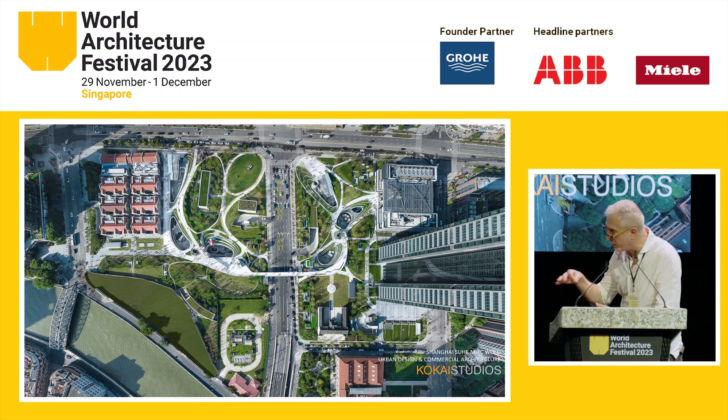The project is located in Shanghai, in probably the most valuable area of the city. The challenge of this project was to try to challenge a system of development in the city, as well as to resew the wounds that the city had been going through in the past decades.

Shanghai is a city that has seen a lot of very fast transformations, sometimes extremely cruel and serious, in a way that the history has been wiped out, and the blocks of the city and the communities have been taken away from their roots. The city went through an incredible system of tragic transformations, leaving a lot of deep wounds in the city. So what we tried to do here was to resume the community to the city itself.

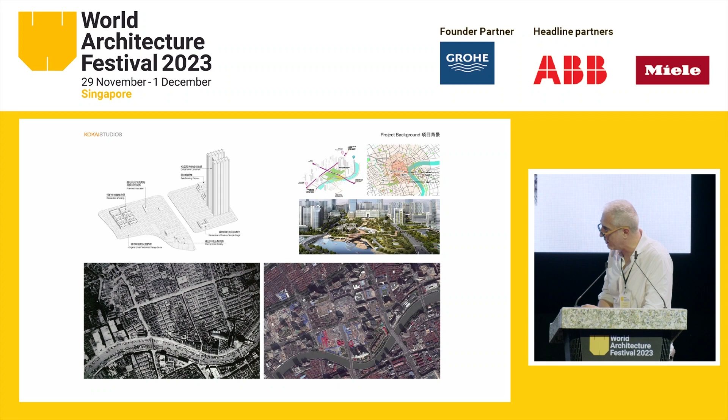We challenged a system in which a plot of land like this has an incredible value for speculation of development from both, unfortunately, the government and the developers. China is a system that's extremely speculative. We tried to convince them instead to have a completely different strategy of development. During the competition for this project, we were able to convince the government and the client to consider a completely different approach to the city.

It is to create a system of layers that reconnect the city to the land and to the waterfront of the Suzhou Creek. So instead of developing a typical shopping mall, as the client used to do, we transformed the system of retail underground, creating an urban valley.

The reason we want to create an urban valley is because we want a sustainable system in terms of carbon-free development strategy, and also to create an efficiency in the commercial space completely different from the traditional one.

Usually, a shopping mall is one of the most inefficient thermal machines in the world. You barely reach an efficiency of 65%, where 35 to 40% of the spaces are heated up or cooled down in a very inefficient way.

We transform this site instead into an open city, completely permeable to the city, with a valley where we can control the temperature—a drop of 5 degrees or an increase of 5 degrees according to the seasons—using the trees and nature that we plant above. At the same time, all the public spaces are open and not conditioned. So in terms of thermal efficiency and sustainability, we reach an incredible level. For us, it was very, very important.

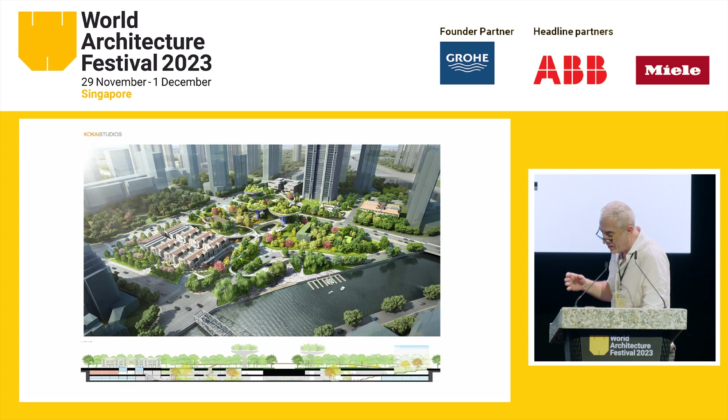We've been working in the Shanghai environment on the city texture for 20 years, trying to preserve the historical heritage of the city. You see the location—it's the last open space left in the very strong CBD of the center of Shanghai. The value of this land is unbelievable.

So to convince the client and the city itself—because the government makes a lot of money on taxes from the retail and tenant point of view—we worked to reduce their targets in order to give a benefit to society, to give a place where people can recognize themselves, can meet, and can enjoy a green park.

That is a very simple thing for us. I come from Italy, from Venice, so for us, nature and parks in cities are normal practice. In Shanghai, it's absolutely not—there are no parks, no green areas in the center of the city.

And as well, you see how this new road that goes from north to south cuts in a very strong way the west and east side of the park. And as well, the very strong development of high-rise buildings around creates constraints to the community around.

So how did we do this? As I said, we create a valley within 3 different mainstream points of attraction on the site. On the left side, we have a system of traditional Lilong, Shanghainese Lilong houses that are being preserved on site. We have an old temple, which is a typical practice of Shanghai of how to deal with their history.

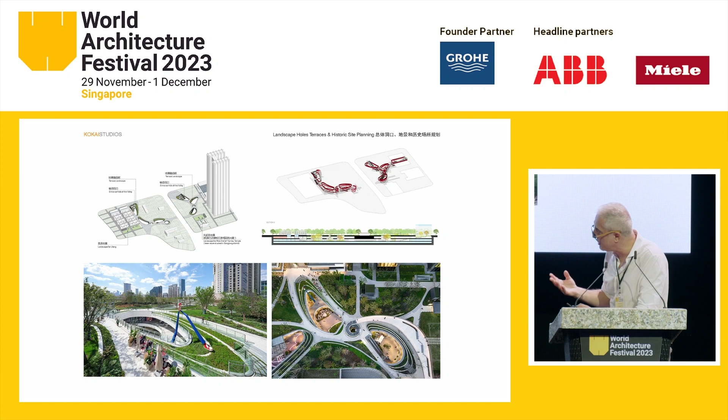So we create this valley, as you see, between the 2 blocks, creating this system of holes. We create a system of gates to go to the different layers, because the site is completely permeable on the ground floor. There is a system of entrances related to the different points of attraction: one in a new building next to the high-rise tower that Norman Foster designed, one next to the Lilongs, and one next to the temple.

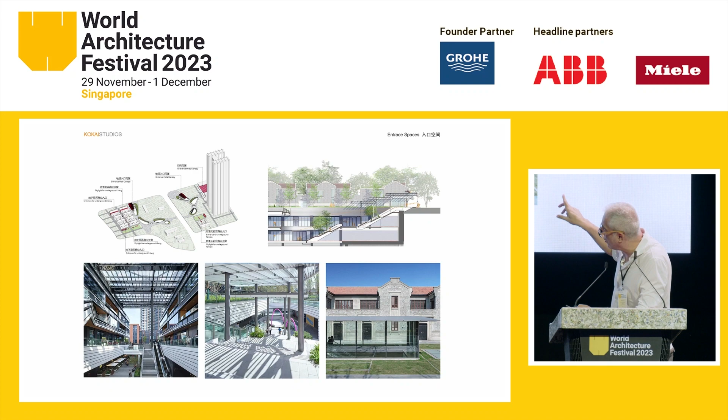In a way, another layer of connection has been created. As with all architecture projects, especially when you work at a city level, the projects are never perfect. Originally, we were thinking to connect even more, east and west. It was a very strong challenge to convince the government and the Traffic Bureau of Shanghai to let us build a bridge on top of a public road.

But at least we were able to connect and give a different opportunity for the two sites to connect to the people. And the system in which these holes and paths are designed in an organic way gives freedom to the people to walk through this space in a very spontaneous way. It's incredible, because for us, after finishing a project, we hide and observe how people use it, because it's impossible for an architect to control a project completely.

You need to have a very strong modesty, because the systems are very complex, even more so when you work at a city level, on a social point of view like this. And it's incredible to discover how people keep going around the loops, always choosing a different path, and never get tired of going around.

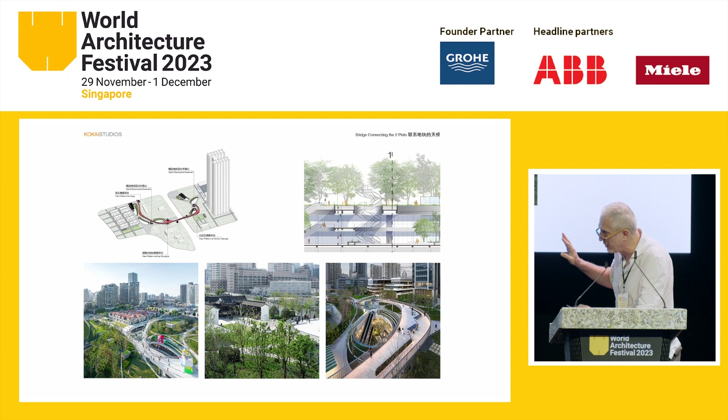And it's incredible. The success of this place is also focused on the usage and on the retail point of view. Let's not forget it's a commercial project. We were very proud about the fact that this project did not attract any of those top luxury brands in the world, the copy-and-pasted projects that seem to be everywhere. It's not a billboard building, as we call the shopping malls, but instead a completely permeable system of functions that are used by the neighbors.

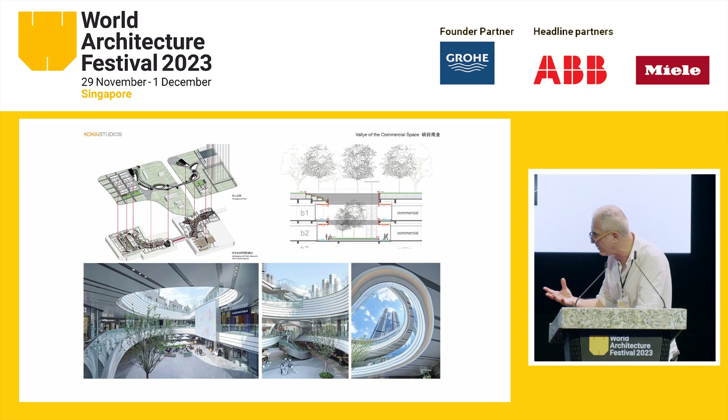So this place became a system of F&B, entertainment and services for the neighborhood. It really achieved the target of becoming a part of the city, integrated and free flow. This was important for us.

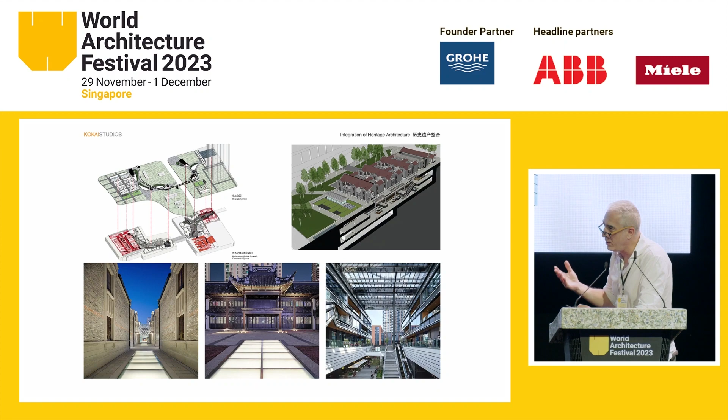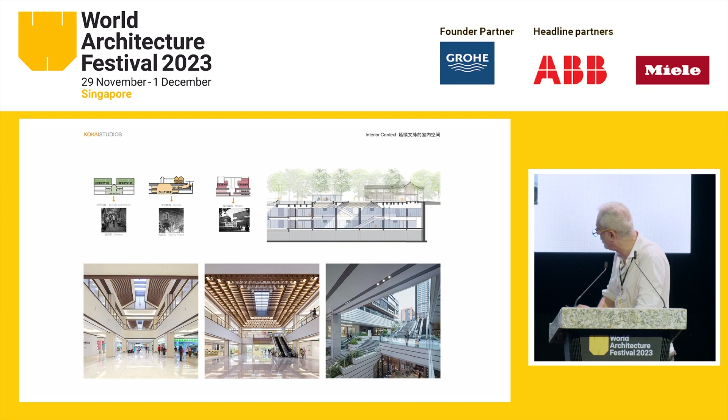We tried to connect the little indoor spaces created under the historical buildings with a visual connection, in order to create a system of curiosity of seeing through layers and to reconnect them in a contemporary way. Even if some of the interiors look very traditional, they are a contemporary interpretation of what stayed above them. We have a hall on top of the temple and another one on top of the main road that stays between the traditional lanes, so that each area is characterized.

I'll just show you a video of it. The project speaks for itself. It's a dynamic project, so showing it through still images doesn't really explain how it works.

Today, the landscape - this video was taken after 3 months of opening. The landscape was not mature yet. Now, after 1 year of being open, the landscape has started to change and was studied very carefully in order to change with the seasons and to provide perfect thermal insulation for the space underground.

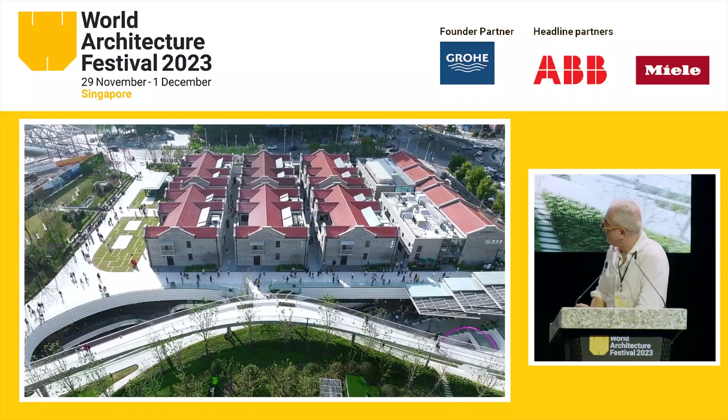Of course, the fingerprint we use on the landscape is very strong, and it's done intentionally in order to leave a mark. We need to dare sometimes. It's very interesting that only 2 levels underground create a visual connection and an empathy between the different layers, which are very efficient.